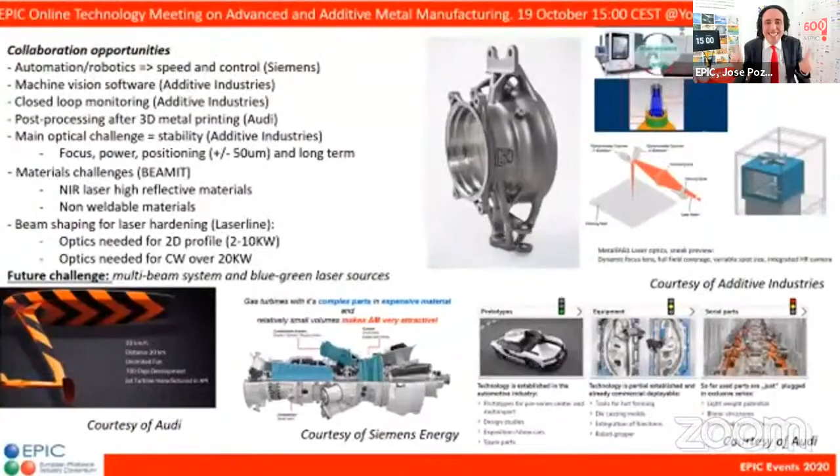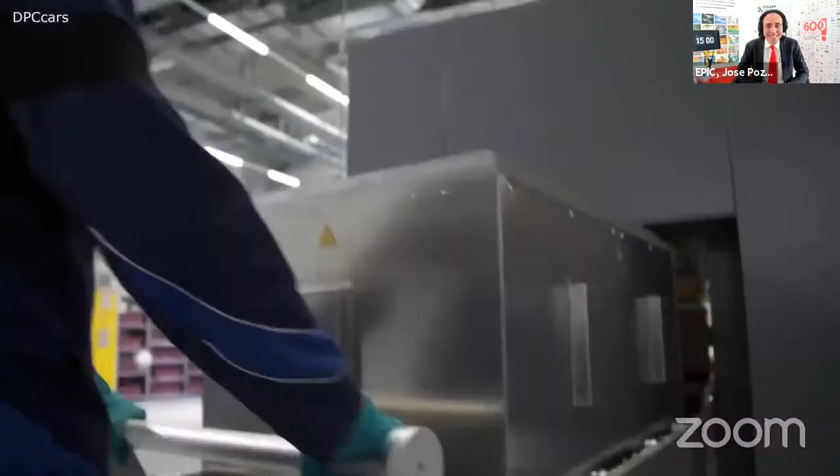Let's get started today on 3D printing of metal. Last October, we had one of the most spectacular online meetings to date. We examined laser metal processing, bringing together the entire supply chain, including large corporate users like Siemens and Audi. We have since then been very busy talking to new users, including Avio Aero, GE Additive, BMW, NASA, as well as Rolls-Royce. But while discussing this expanding field of metal additive manufacturing, we uncovered several important unmet needs, which means there's plenty that needs to follow up. So on Wednesday, February 10th, we'll organize a reunion to bring back those leaders in their field. We'll also introduce emerging players who are exploring new paths with new challenges for the supply chain.

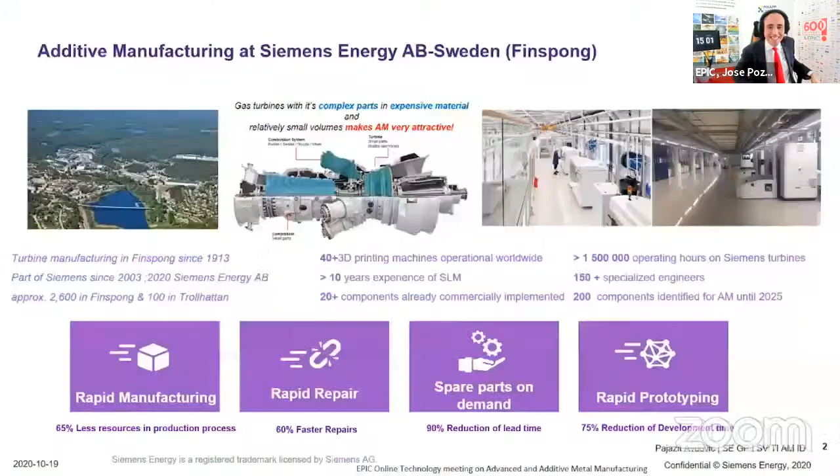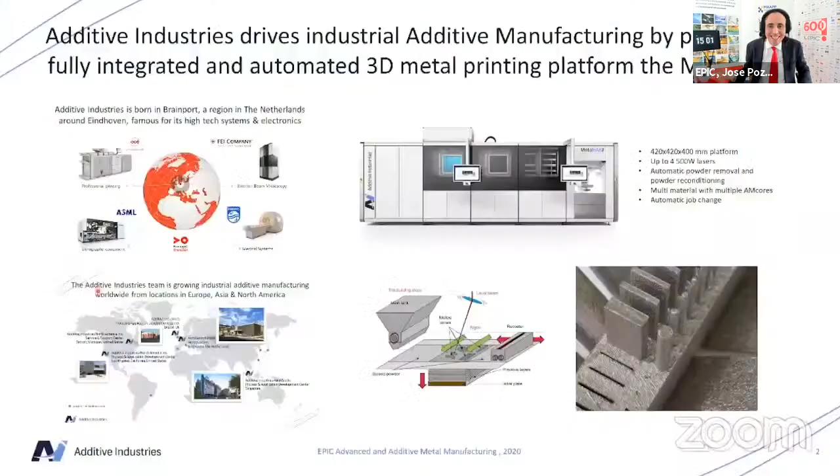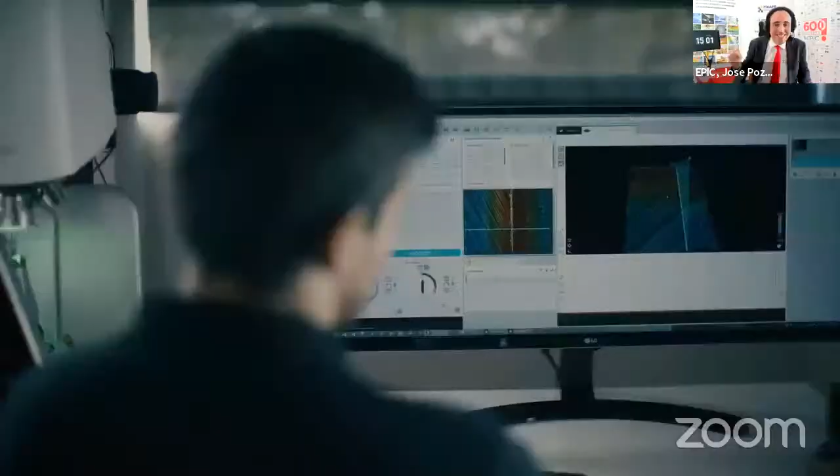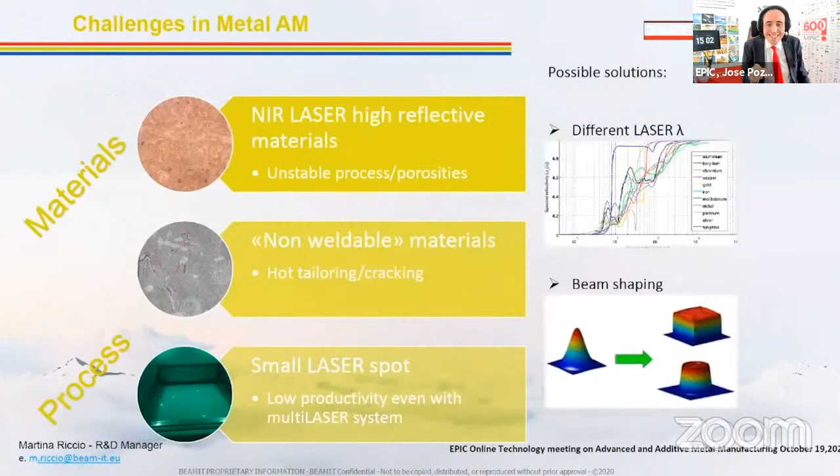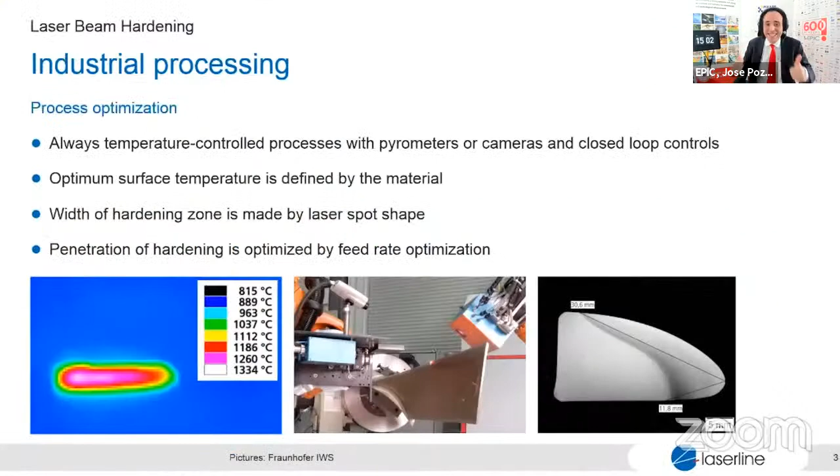The 3D printed metal service provider BEAMIT wants to co-develop near-infrared laser processes for materials with high reflectivity. So let's see what system integrators like Lasea or Prima Additive have to say. And I can't forget the amazing presentation from Laserline and their challenges with laser optics for 20 kilowatt CW operation. Laser optics? They could not have knocked on a better door. Aspericon, Optoman, WCW, Altecna, everyone's here and ready to do business.

As you can see, I'm having so much fun preparing these videos, and then I also love the energy that they try to bring to this community. We are doing so much work on trying to bring the integrated photonic community together, the laser community together, the medical industry together, and Francesca Moglia from EPIC has done so much work in the last weeks, connecting all the different companies that we have in the 3D printing of metal sector.

Today we have an amazing agenda thanks to Francesca. Francesca, you are the only person worthy of explaining what's going to happen today. Thank you very much, Jose.

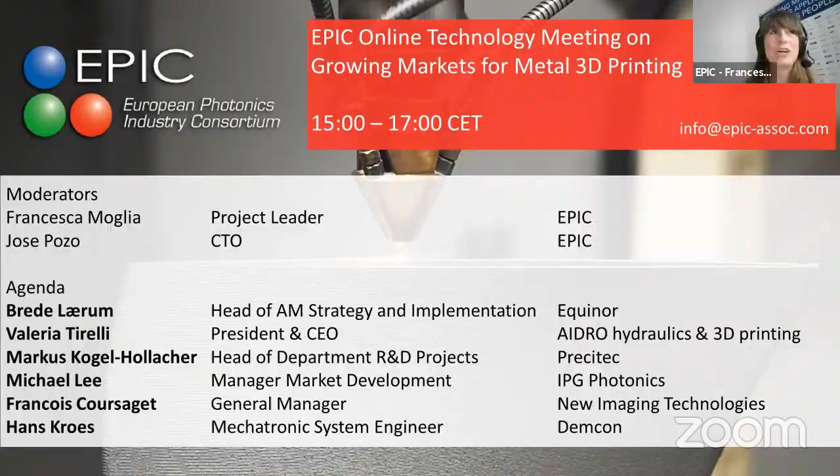Thanks a lot, everybody, for being here today, also on YouTube. As we usually say, here is the list, a bit a boring one, of 6 speakers, but that is not what this meeting is about. The meeting is about this much better slide, representing all the people who signed up for today, filling up our value chain for metal 3D printing.

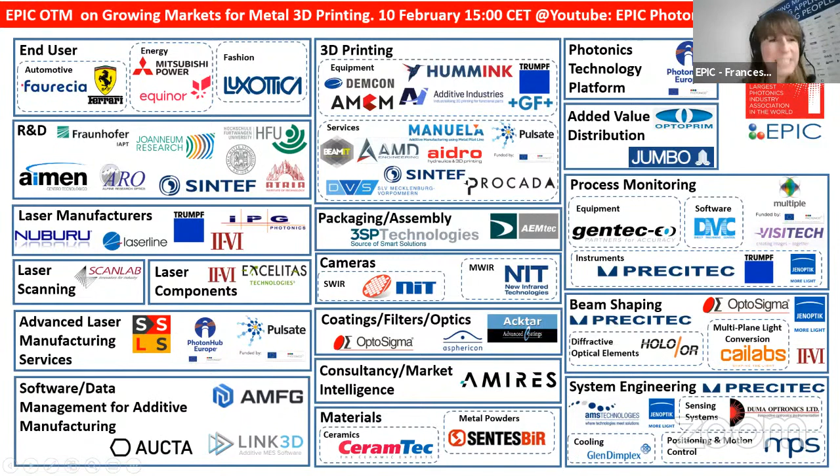As you see, we have end users from 3 sectors happily interacting with us to explain their challenges. We have 3D printing equipment and services - some of you sell the machines, some only the services, some both, so it's interesting to have this middle step of services and job shops. Then we have the rest of the supply chain: laser manufacturing, packaging, cameras for monitoring processes, processing systems, beam shaping - all possible is here.

I guess the best way is to accelerate this introduction and go back to Jose and to you. Francesca, you've done such an amazing job over the last months, connecting the entire supply chain of all the different advanced manufacturing technologies. Hats off to you.

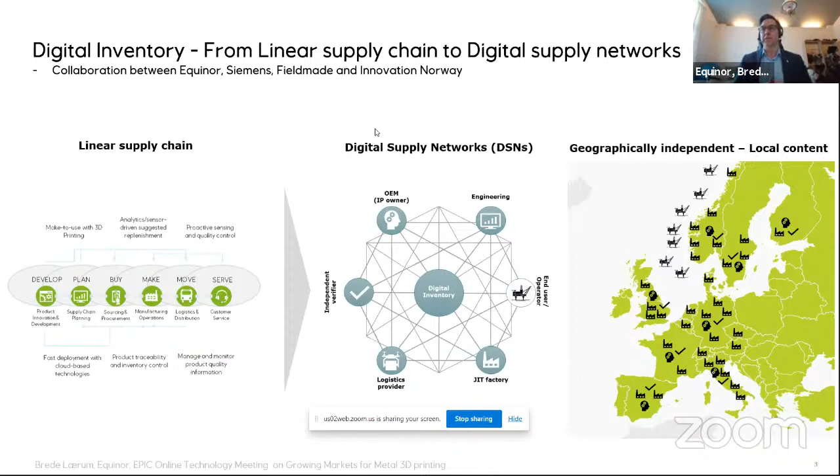But especially when it comes to reducing maintenance and modification, that means for me, instead of replacing a whole compressor, a whole pump, because we have one component inside that is faulty, we can now 3D print the one part that is the problem, and replace the single component instead of the whole system. So we are in this also changing our maintenance philosophy.

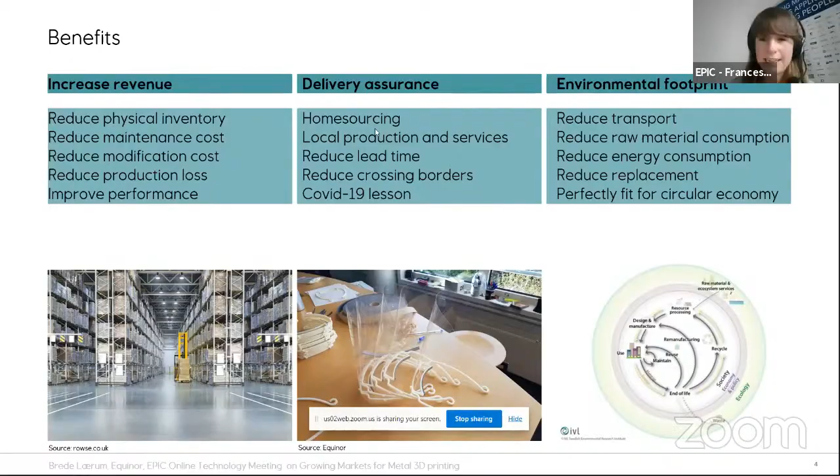Thanks a lot, Brede. Wow, that's something that we really support, because if you present such a nice way already of supporting you and how you're already interacting with your full supply chain, it's basically what we always support also and do with Photonics. So my question would be now, where do you see the connection and participation from the supply chain from Photonics, like more starting from the machine builder also, but the Photonics yourself, and where do you see the challenges that the supply chain could help you with in, of course, implementing this system?

Okay, of course, there are many answers here, but one important issue is that it's not efficient if every supplier and every end user should start building competence and capacity in additive manufacturing and start purchasing lots of machines and having their own production capacity. That's not efficient. So if we go back to my previous slide, having factories distributed geographically around Europe, we need maybe joint ventures between suppliers to go together and build these factories.

You need, of course, to build competence. You need different kinds of production methods like additive manufacturing. You need CNC machining, you need heat treatment, and you need, of course, maybe both X-ray and CT scanning to ensure quality. So building these centers so that we can get the production capacity we need for the future. I call them just-in-time factories, or you can call it on-demand production, call it what you want. But to start working together and build this as an industry rather than working independently, everyone doing things on their own, I think that can really help us going forward.

Can I also ask you if you see that it could be a challenge if we don't do like this, that subtractive manufacturing will always be winning against additive manufacturing? Is it something that maybe can be an obstacle for additive manufacturing? Definitely. I meet a lot of resistance within my own company. I see also a lot of suppliers who are resisting this change. And of course, change is difficult. You have to move into the unknown.

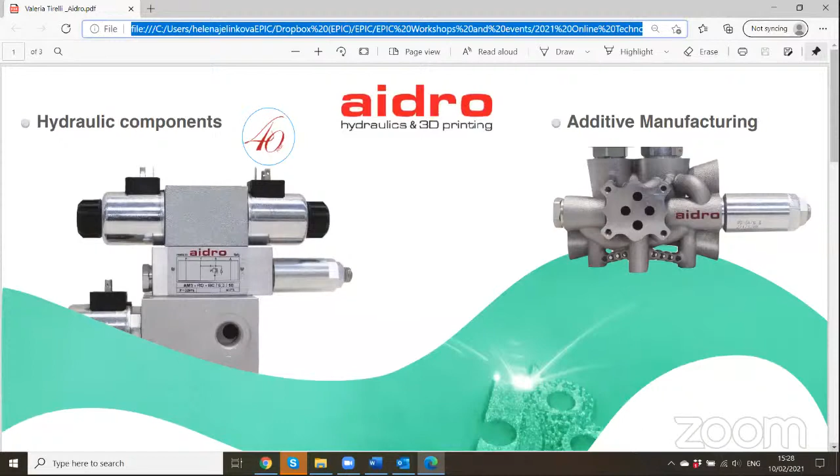At the beginning, it was only for making prototypes or tooling for our conventional production, but we understood that there are a lot of benefits that we can have with this technology. So we started to make new prototypes. At the beginning, it was only polymers, but then we discovered also metal parts, a new generation of metal parts. We started designing and engineering parts with a new approach. We changed our mentality. We also had to train our engineers and technical people to understand the benefit of these technologies. And we started to look at the problems in a different way.

We were able also to develop new products thanks to additive manufacturing, thanks to the fact that we have fast prototyping. We tested different shapes, different functions, and we are able to create a new serial production in a very short time. But we discovered also that with additive manufacturing, we can integrate more functions into one part, or we can combine multiple components into one, saving assembly time, for example.

And also we understood that there are a lot of benefits in the digital transformation. So to start this new journey, together with other companies, not all alone, and to start to think that in the future we will change, for example, our spare parts from physical spare parts into digital spare parts. This is an amazing plan. But we have to start today to understand what additive manufacturing is.

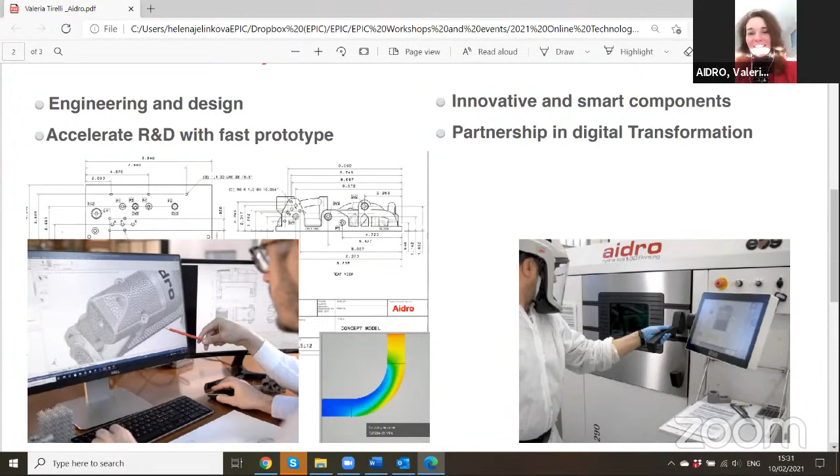And we decided to invest in this technology and make our internal department with a laser powder bed fusion machine. So we have some printers in-house with different materials, and we learn day by day. So making parts, designing parts, and then printing parts, we learned a lot. And now I think we are ready to do something for other companies, but also to learn and collaborate with other companies. And in the next slide, you can see that we can do different products, but the idea is to share the challenges, to understand which are the actual problems, the problems that seem impossible to solve.

But to do this, we also need a better and faster printer. This means more lasers. We have, for example, one laser, two laser machines. Now we have 12 laser machines developed by some manufacturers. But I'd also like to ask the photonics industry, maybe you can think about having a 1 million laser machine, to have faster production and to help additive manufacturing become real mass production for the future.

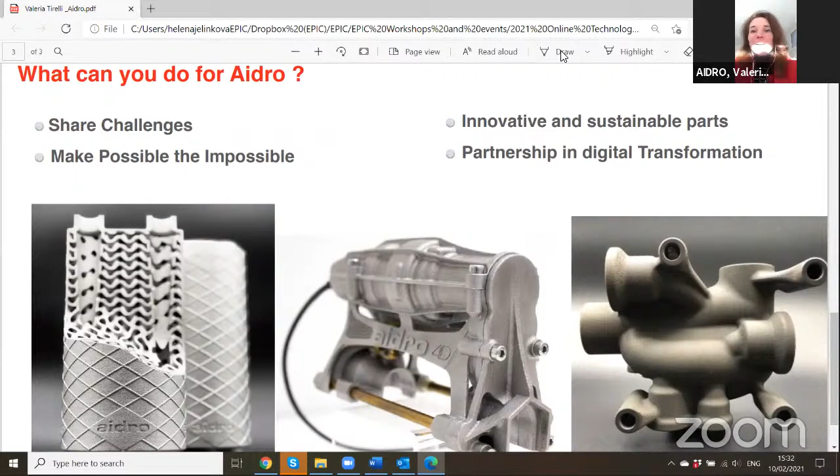So I'm really happy to be here, and thank you so much, Valeria.

No, don't worry, that's going to happen. We're going to find collaborations. There are many questions, this is an EPIC meeting, and you knew your lesson. You came here with challenges. The first question comes from Michael Lee from IPG.

Michael, what's on your mind? As we have end users in the room, and we've seen it from the well-developed semiconductor industry, they lay out a roadmap for us, for this photonic supply chain, in terms of future tasks in 1, 2, 3 years on build rate, costs, and so on. As you mentioned, you're increasing the number of lasers. Is that all that would solve the challenges? What challenges do you have today?

Today, challenges with the machine are multiple. Productivity is one, and maybe that could be solved with lasers. But also, the cost of the machine, because today there are different manufacturers of the machine, but the average price is quite the same, and it's still a quite expensive technology. So to implement this technology at the moment, we have to find a good balance between the added value of the product and the cost on the market. So another good point could be to reduce the cost of the machine and the cost of the products.

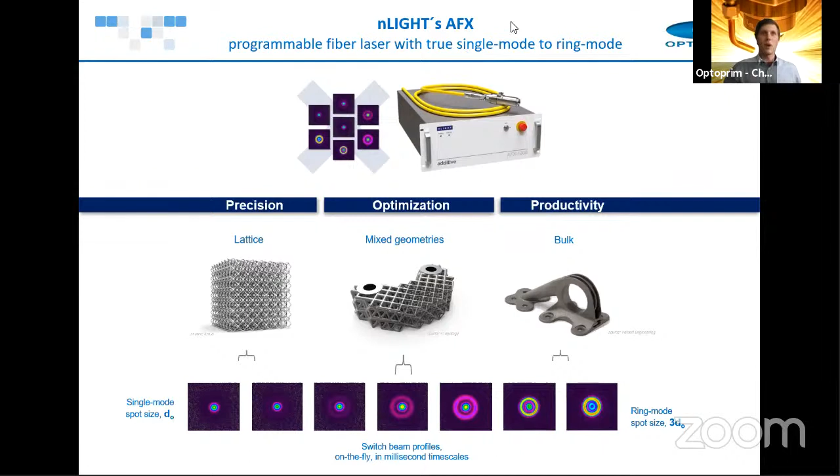And maybe that's the next step or level for the AM market and production using parts in the industry. What's really amazing here is you can go from one shape to another while keeping the average power, and we're talking high range power, around 500 watts. Keeping the average power in milliseconds while going from one shape to another is truly amazing. We have 550 watts in the core, but the total laser power is 1.2 kilowatts, and we can distribute the power from the inner side to the outer side on the fly during scan speeds, within the different geometries of the part - inner, outer, fine features, mixed features. That makes it really strong, flexible, and very productive at the end.

Christian, good luck with the Prism Awards. I'm betting on this one.

Yes, thank you for the kind introduction, and hello everybody for this interesting afternoon. Again, an interesting topic EPIC put together. I think I can answer some questions which have been asked in the last hour. I want to point out that 3D printing is not only what's now named the PBF-LB process - it's not only photonics, photons, and powder bed. 3D printing is more. For information about Precitec, you should visit our website, so I won't waste time on that. If we talk about printing, we also talk about DED with powder. These are the typical nozzles you find in DED processes: off-axis, ring nozzles, multi-beam nozzles.

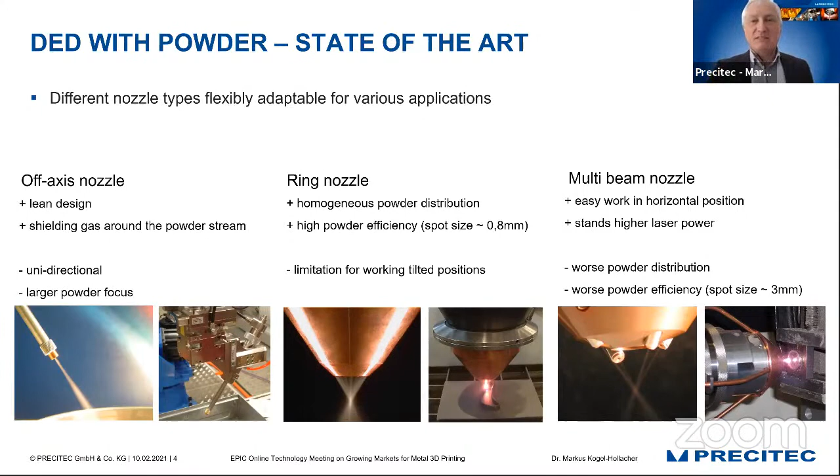So this is not new, and there's no innovation behind it. But if we talk about innovative machines, we need to talk about BeAM, for example. BeAM is using our devices, our modules. Precitec is famous for generating modules. It's like Lego for laser technology—you just put together the beam guiding modules you need for your machine, and BeAM is using our modules for their machines.

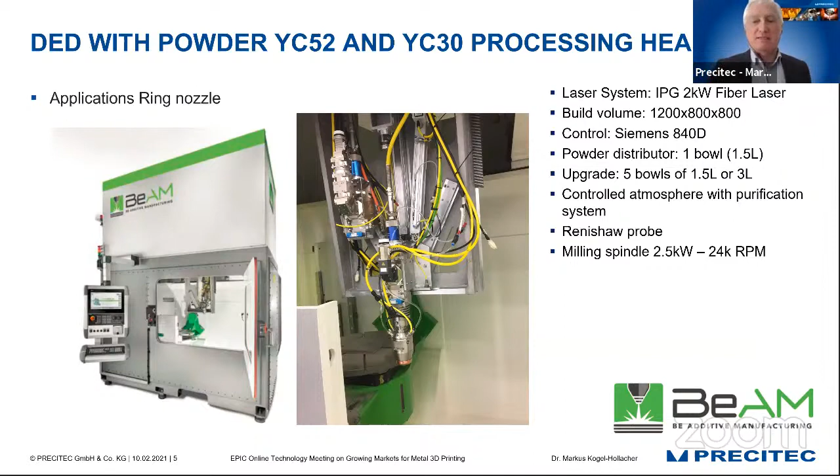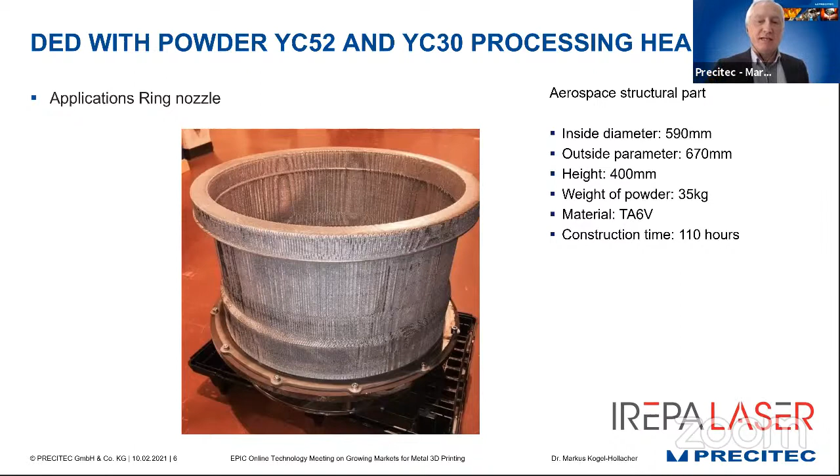But one of the topics Jose was addressing in the invitation is sensor technology—sensors, machine control, machine vision. And as you may know, I've been talking about one sensor for the last decade, which is the OCT sensor. From my perspective, and from the perspective of many users nowadays, it's the only sensor in photonics which can really measure the needed information during processing. And the needed information in 3D printing, in additive manufacturing, is surface height, surface structure, surface topography.

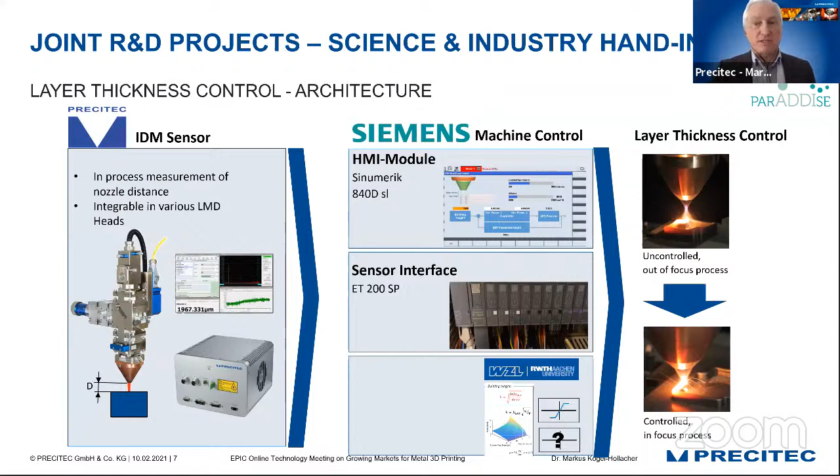This is what we did together with Siemens in one of the European funded projects we have been involved in. This project is now finished, and we were able to build a closed loop control for DED powder processes based on OCT. So we do not control laser power—we control the speed. That's why we went together with Siemens into that project, because if you take a deeper look into the control variables, you will see that speed is much more effective on process regulation than laser power.

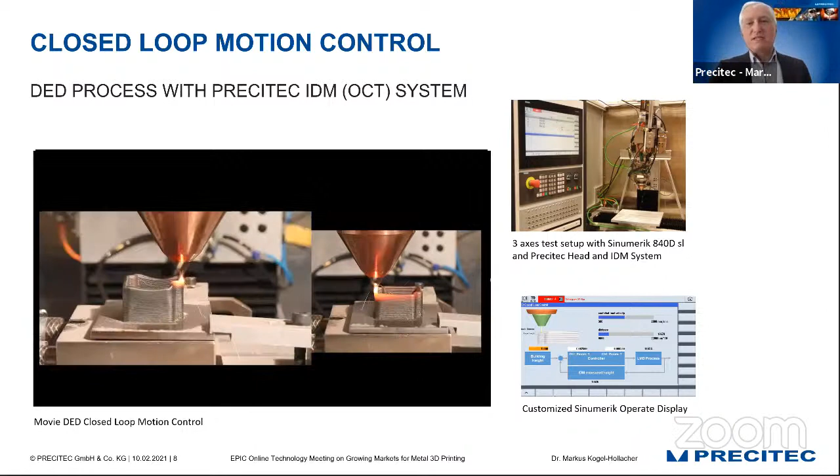I don't want to go into deep detail, but you see this is the uncontrolled process. We have a controlled process later on. So this is the closed loop control we use OCT with.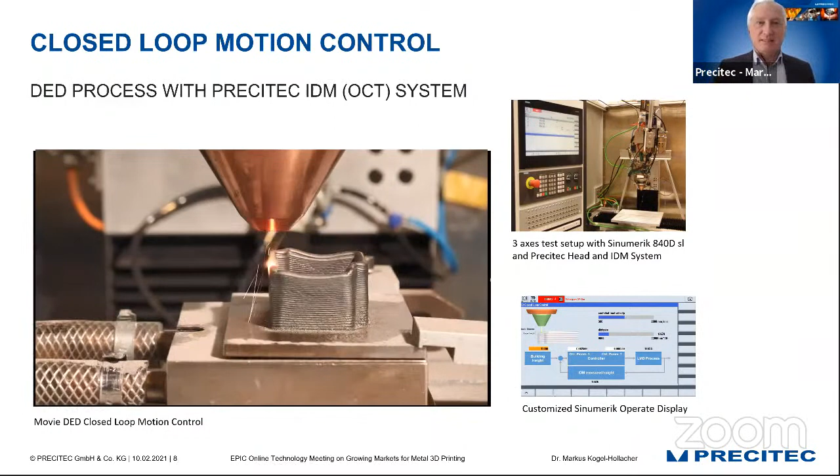But let's go to my other favorite topic, which I've been talking about for some years as well. It's the GPS system for photons, which I call the future of laser materials processing. We talked about that in the Q&A of the last presentation. So it's important to know where photons should do their work, and it's important to guide the photons to the right position.

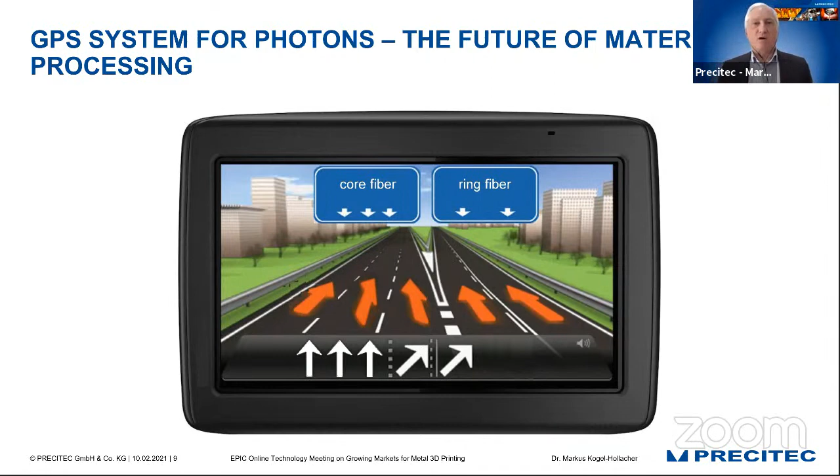Fiber, powder bed or not powder bed, and in subtractive photonic applications with ultra-short pulse lasers, whatever—we are talking nowadays about GPS systems for photons. One of the devices we have generated in the past is our printer head, which we call the coax printer.

So if you do 3D printing, and if you use wire as the additive material, the easiest way to be direction independent is to support the wire from the center and bring the laser from the side. This is what we have realized with that optics, with that processing head.

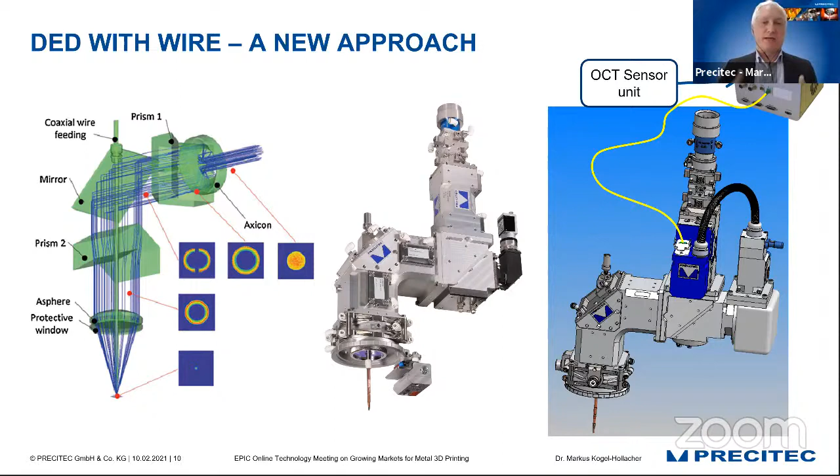You see that we come from a standard laser—it can be any kind of laser, any beam quality we can use. So we generate a ring, we open the ring, introduce the wire, close the ring, and then we do the printing. You see one of the devices we have recently installed on a machine.

You see also all the interfaces for state-of-the-art sensor technology—camera, OCT, pyrometer—everything can be adapted. It's again the modular principle.

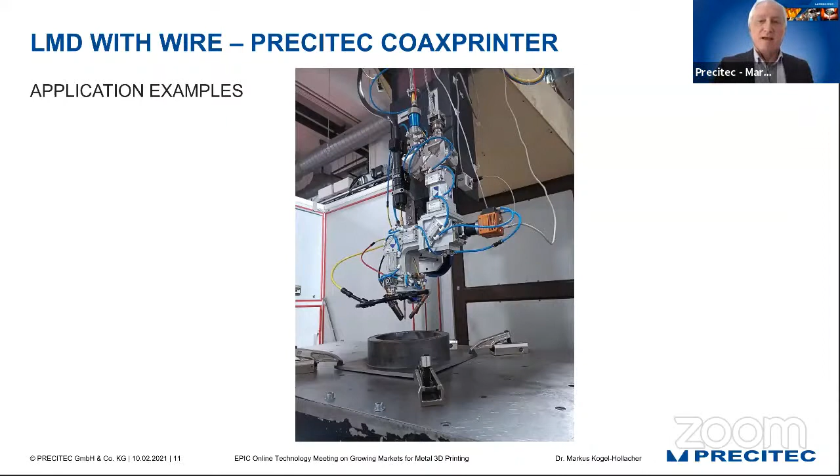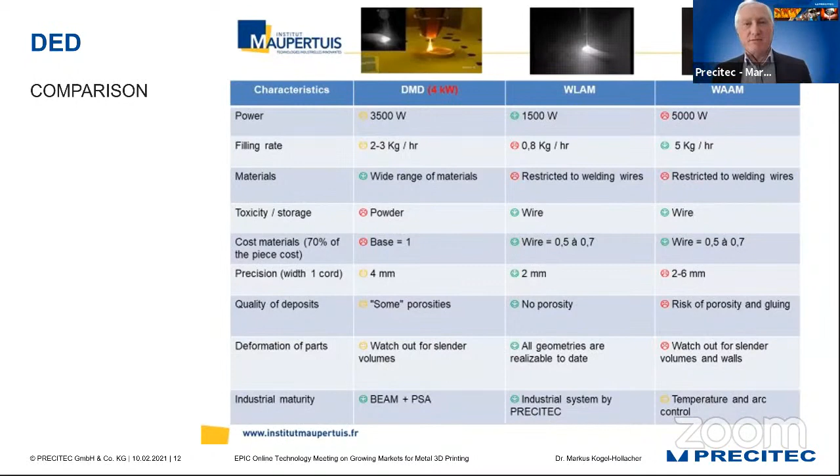And if you compare that process, which is here in the middle of the table, with the competing processes—on the left you see the powder process, on the right you see the wire process without photons, what we call the wire arc possibilities—you see that we are very good in accuracy, we are not so good in filling rate. Filling rate here is getting even better; I'll talk about that later on. So this is a very, very interesting alternative to 3D printing from the powder bed.

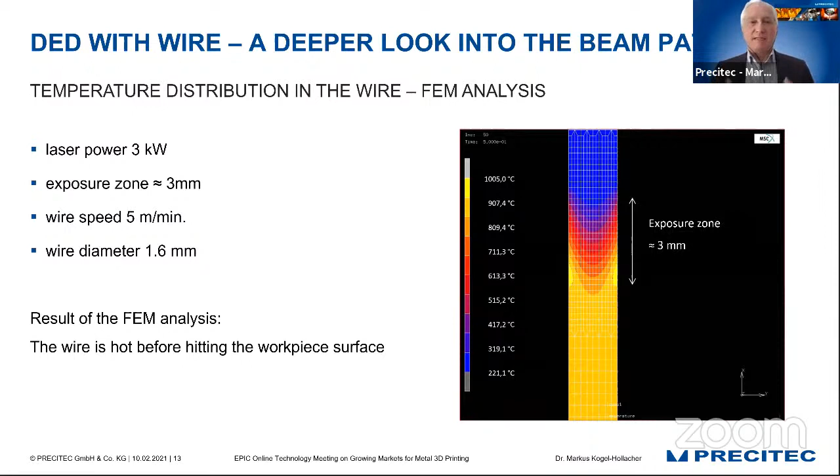What makes that optical principle so unique is that with the special beam, we heat up the wire before it goes into the material or onto the surface, so the process is very smooth—it's even the smoothest process you've ever seen in laser materials processing. But this is the key topic: we can use any kind of material. You see we did processing with stainless steel, aluminum, titanium, Inconel, flux core wire, bronze. This is easy.

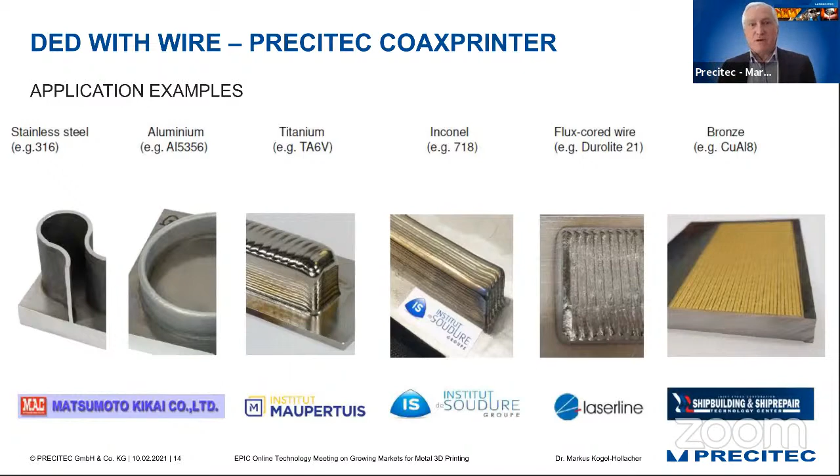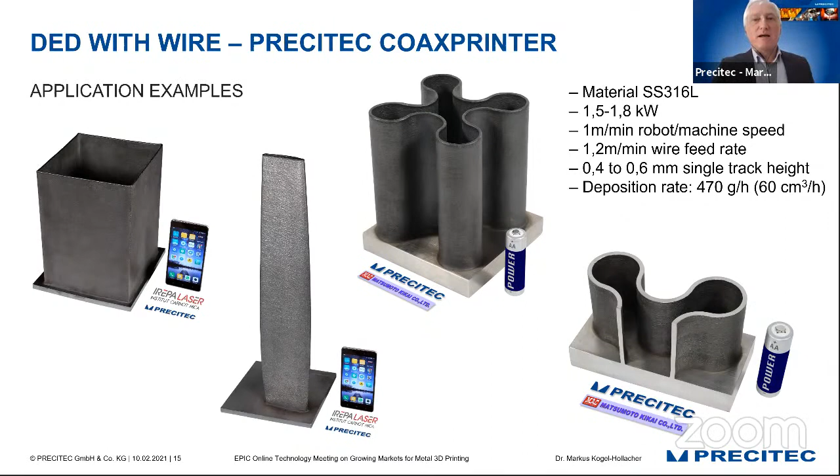You change the wire in less than 2 minutes and you're ready to build another part with another material. Here you see some application examples, always with a battery or a mobile phone as reference, to show how big we are. Here you see the other applications.

And what is very important, as I said, the process is the smoothest photonic process you have ever seen. And we don't waste any material. 100% material use. You do not need to clean anything, you do not need to recycle anything. This is the future of 3D printing.

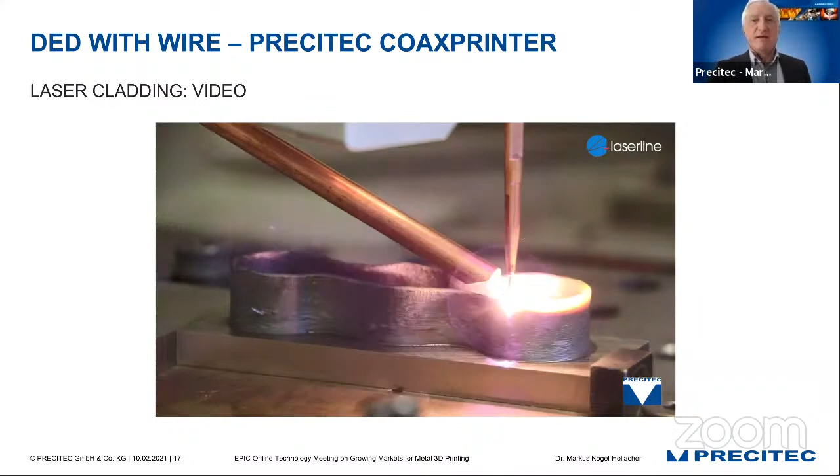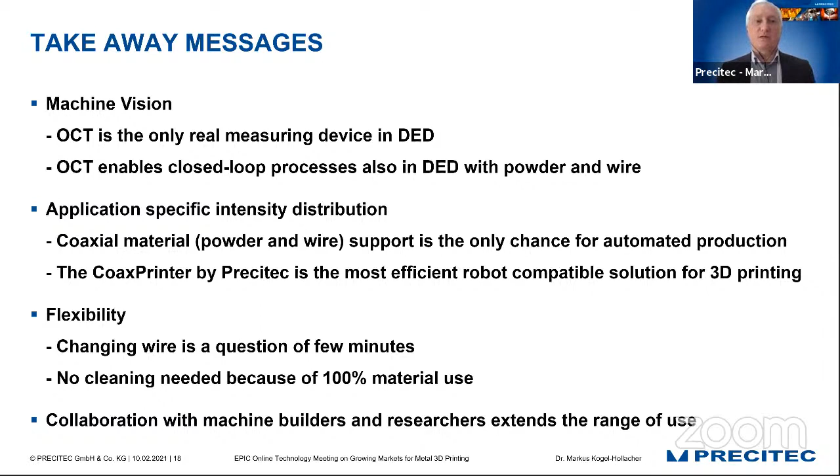So let's take away messages to take home. If we talk about machine vision, the OCT sensor is the only measuring device in DED. It's also a measuring device in the powder bed, the PBF-LB process. I haven't had the time to go into that topic. We show application-specific intensity distribution with the coax printer, and we show that this is a highly flexible process.

So what can we do for you, and what do we need from you? We offer the easiest to handle 3D printer device for build-up of near net-shape geometries and functional assemblies, no question. What we need is to raise the confidence that the DED wire process is a real alternative for 3D printing, and we showed there is more potential applications, for example hybrid applications.

So with already existing products, you can print on your functional device, and then you can generate standard parts by subtractive processes, and take the hybrid, the 3D printer, and print on this part where you need it. Okay, so thank you very much for your kind attention.

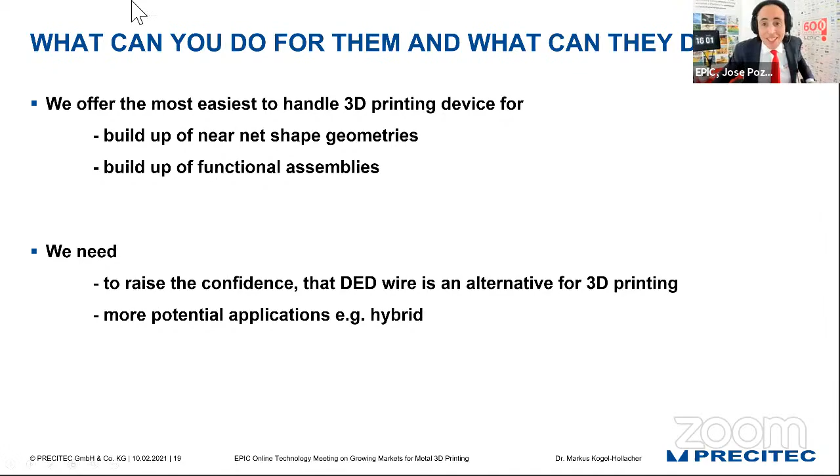Thank you very much, Markus. Thank you so much for this, and thank you for all the different opportunities that we have here. Francesca is smiling — when Francesca smiles, I keep quiet. Francesca. You are muted, we can't hear your beautiful voice. I don't know what's going on, but let me take this. Markus, this is an epic meeting, you know, epic, and thank you so much for joining. You made me so happy.

But in the epic meetings, we ask the epic question: a few specific challenges, room for cooperation — what can you do for them, and what can they do for you?

Yes, so as I said, if you think about 3D printing, you should not always think about powder bed machines. We've heard powder bed machines are maybe too expensive, maybe too slow. There is a difference between powder bed processes and what I have shown — it's the accuracy of the structures you can generate. But if you do not have high demands on very fine structures, you can easily take a processing head like I've shown, put it on a robot, and print your part. You just take the CAD data file, put it into the path planning, and at the end you're ready. It's near net shape, the surface quality is excellent, comparable to the PBF-LB process. And as I said, we can use any kind of material — every wire you can find on the market can be processed with photonics.

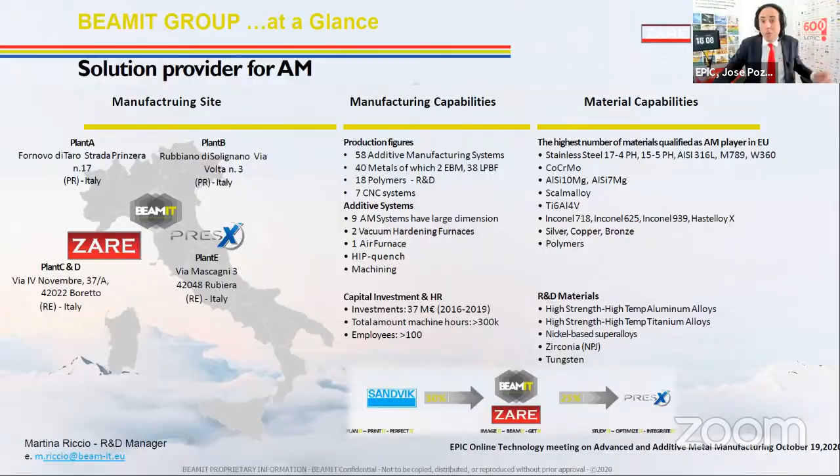And yes, of course. Martina, I want to highlight that in the previous meeting, it was clear that there was huge room for cooperation because BEAMIT is one of the largest solution providers for 3D printing that we have in Europe, and you were looking for many R&D cooperations. Actually, that was your call, starting R&D cooperation. So I want to refresh this. We already introduced many companies to BEAMIT, but anybody who wants to start any R&D cooperation in 3D printing, from beam shaping, from real-time monitoring to detecting of small defects, Martina and many others are the entry point for BEAMIT.

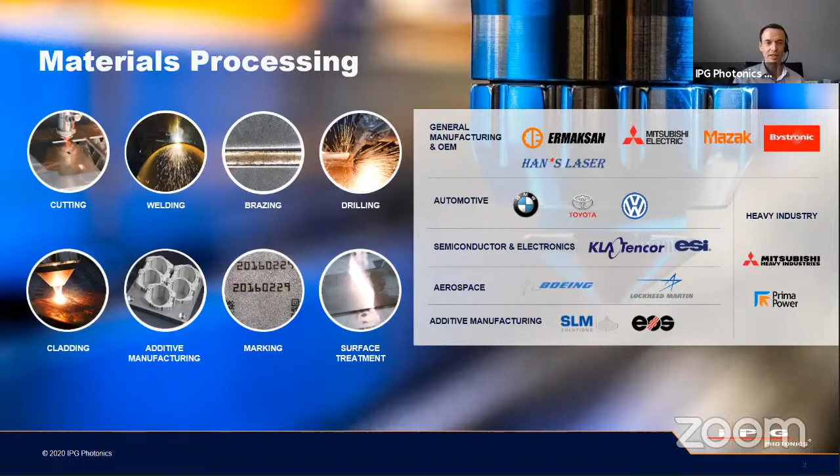As a technology leader and pioneer of fiber laser technology, we have been linked with the 3D printing industry for almost 2 decades. So we were there at the early stage when this metal printing industry switched from inefficient CO2 lasers to the first fiber lasers. And it is an amazing story on the continent, how this was taken from the institutes, from a few R&D systems, to being really widespread in the industry. And we all want to continue on that, I guess. So you see here some of our reference customers on the list down there, EOS and SLM, for example, which have a long way with us already.

To continue with that, let me share some of the insights on what we are working on and what we want to continue discussing with you. Recently, we introduced the world's most compact fiber laser sources, which are used in the 3D printing industry right now. They are not limited only to 1 kilowatt, it's going higher. These are the most compact systems on the market, which save some costs in the machine, of course, and some space.

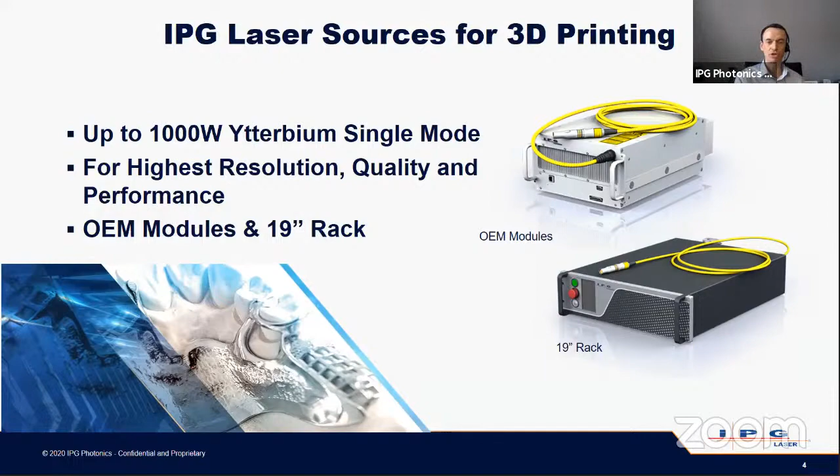More widespreading ideas: we have seen the race between the integrators for putting more and more laser power on the machines. And I guess this race is headed up by SLM currently. You see an example on the right side. And as I understood, Valeria, you're one of the earliest users of such a nice tool with so much laser power on the machine. So good luck getting processes and many parts done with that amazing tool.

Of course, this is only one part of the race, let's say putting more lasers on one tool and stitching the scan fields. On the other side, we have heard already about the mode beam propagation switchability. We call it adjustable mode beam laser, AMB laser, which we can produce up to 25 kilowatt. This combination of single mode and multi-mode beam propagation can be switched, as we already heard, in milliseconds on the fly. So we are able to support you, not always up to 25 kilowatt in the beginning, but let's start seeing how this enrolls into your processes with as many kilowatts as possible, so that you can get the cost down.

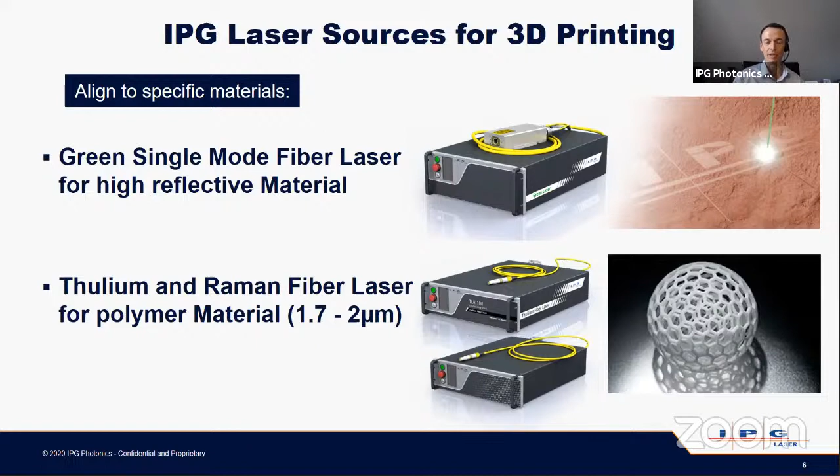We have seen also for other materials that we need to adapt the wavelengths too. In our really broad portfolio of fiber laser sources, we also find suitable sources for high reflective materials. For example, in the past years, a huge topic for all of us has been finding suitable single mode green lasers for that. We're also having them in the portfolio, but also, looking over to the polymer 3D printing machines, different kinds of materials can be directly addressed with different laser sources, different wavelengths, where they have different absorption behavior. And this is all within our portfolio. We would be happy to discuss that further.

That already sums up my presentation. I go to the classical EPIC question, but before that, let me sum up what I wanted to present. We are in many of the integrators. We're helping them decrease costs and increase the throughput, and we would be happy to continue with a huge portfolio of different solutions from one supplier. What can we do for the EPIC network? With all the experience we have in the field, our lasers have made progress for two decades, we are a reliable source provider, plus have a proven world record on operating hours, which is beneficial for the end users. And so what can you do for us?

We would like to take your business cases and discuss your ideas to get rate, reliability, and repeatability to the next level, so that we can succeed with the 3D printing story on the European continent. That's why we're looking for partners which can take more designs or new designs which absorb more power and even reduce the footprint per watt and the cost per watt further. Thanks for listening.

Thanks a lot. I hope you hear me now. Yes, Jose is happy. So sorry, before I was dropping out.

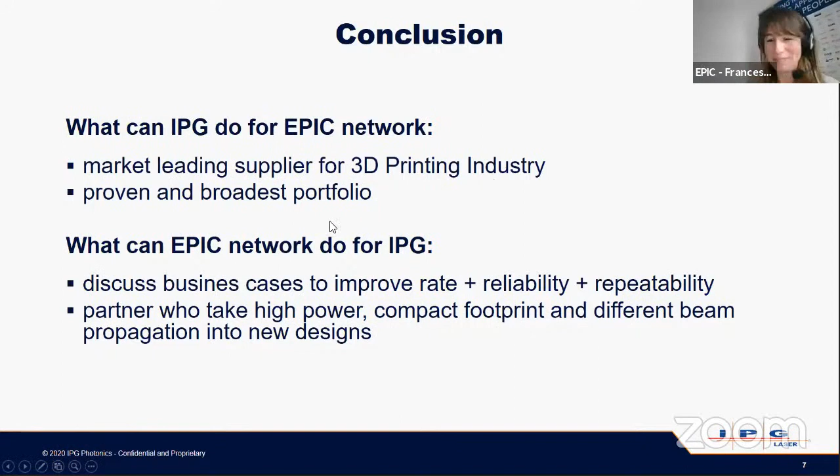So thanks a lot for your contribution, Michael, it's great to discuss always with you also on a general level. I have first a question that is a bit more general. You are dealing with different materials, and we saw the different wavelengths you are trying to approach. And I guess that for AMCM there is also a question, so maybe he can ask this in this topic, right? Yeah. Bernard, thank you.

First, I have the impression that if you have faster scanners and more laser power and more lasers, the whole process runs faster. That's just part of the story. If you add more horsepower to a car, it doesn't mean that you can drive faster on the road. You have to consider heat impact into the powder and all those things. So we're working on that. Beam shaping is an issue, but there's much more, gas flow, than just laser power. Just to correct that a little bit from the previous discussion.

My question to IPG is the following. Your current green lasers are pulsed, and what we need is CW, especially for copper materials. Is there any progress with the current model? Thanks for raising this question. Actually the lasers are QCW, having repetition rates of 180 megahertz, and to my understanding, the material integrates over that already. We have integrated one of your QCW green lasers, and the results were not as good as CW. That was the first part of my question. So it's still a QCW green laser, right? Yes.

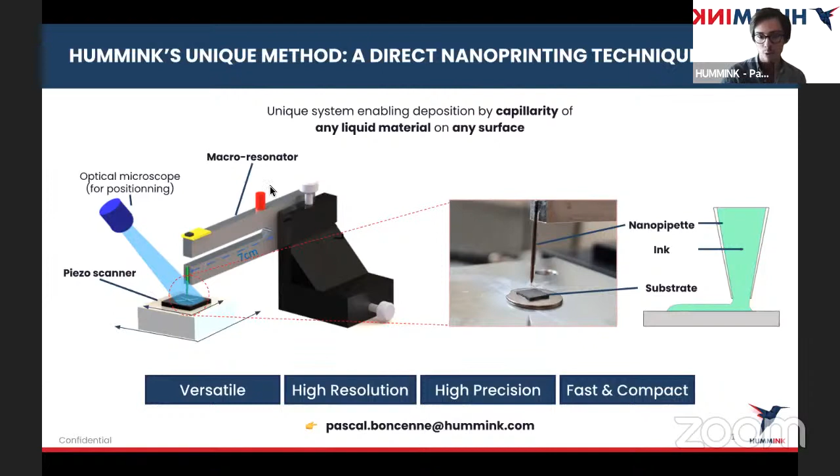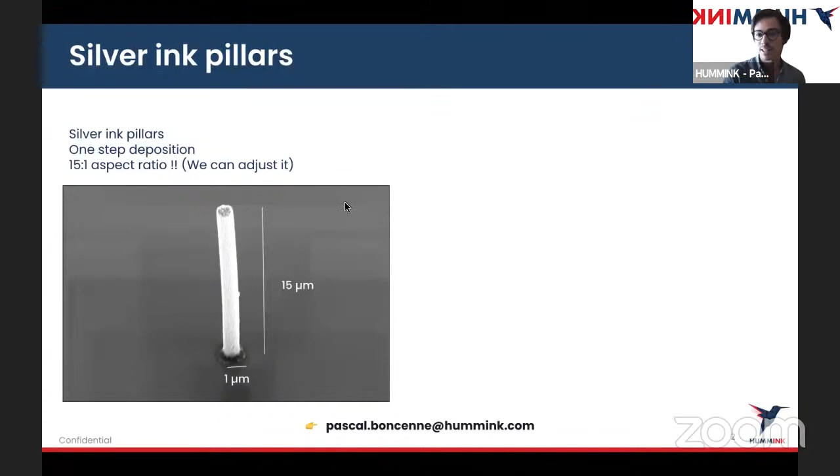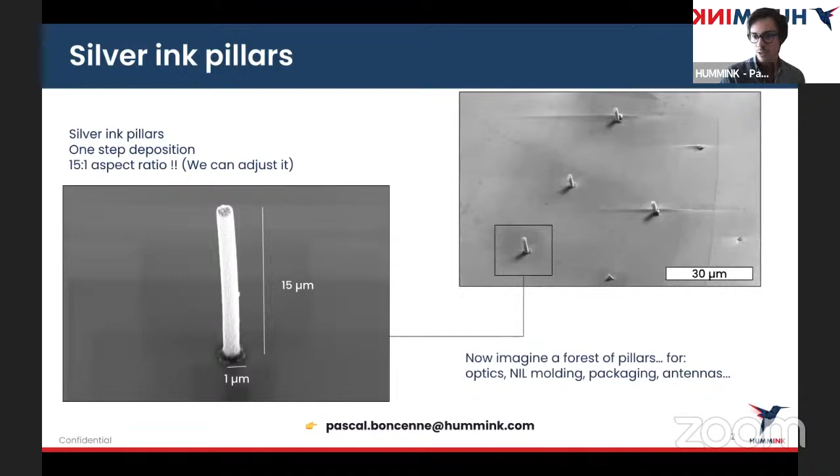So I wanted to join this 3D printing meeting since we're able to, as I said, print different types of liquid, and we can deposit colloidal suspensions of metal, and we've been able to deposit silver ink pillars like this. Here we have a 15:1 aspect ratio, and you can see that we can design objects at a very microscopic scale, and we're able to design a forest of silver ink pillars like this. Any liquid into any structure.

This is not metal printing. It is not, I agree on that, but this is one of the most innovative things I have seen in the 3D printing ecosystem. Any liquid can be 3D printed onto any substrate, and they have the whole process and they want to make their own machines.

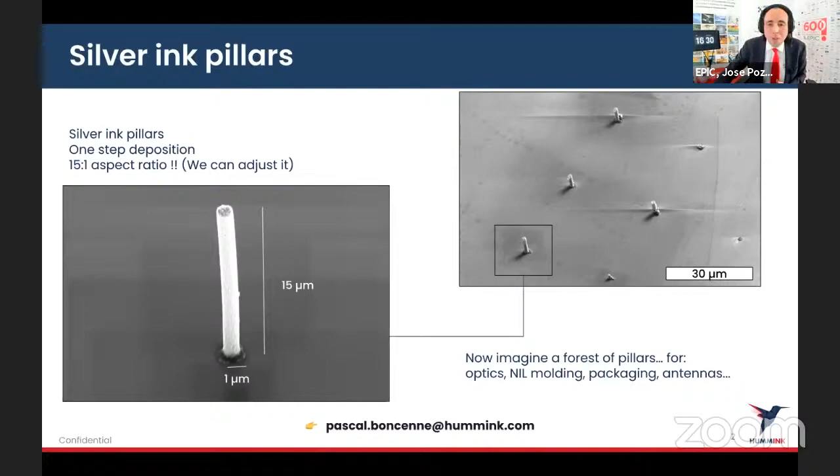Francesca from Ferrari, let's discuss this offline, but this is one of the most innovative companies that we have in EPIC. Pascal, don't answer the question about the investment. I know the answer and I want to put some money on this. This is really, truly great.

Thank you so much. And I want to go now to the next presentation, to a company that has made a big difference in the field of shortwave infrared sensors, New Imaging Technologies. I didn't make a mistake this time. New Imaging Technologies. Francois Coursaget, thank you very much for being with us today. NIT, the floor is yours. Yes, hello everybody.

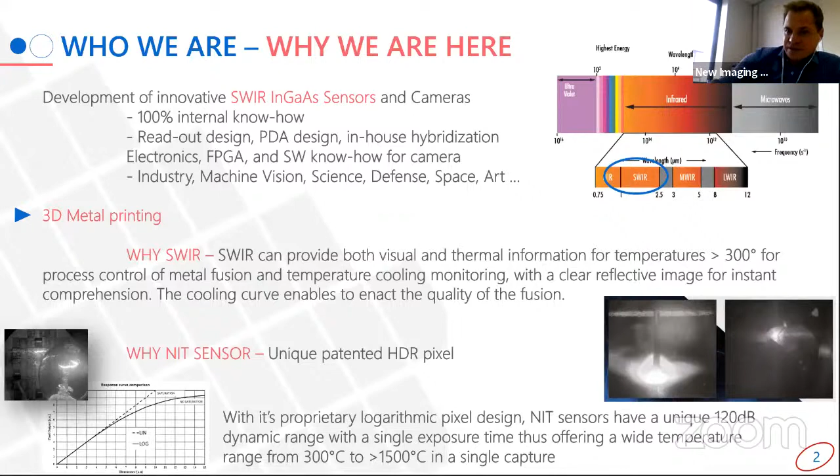Now, why an NIT sensor? Our sensors have a unique and patented pixel design, where we have 120 dB dynamic range within one single frame and within one single exposure time. That means we can actually explore this huge dynamic range from the visible reflections all the way to thermal information up to more than 1,500 degrees with a single capture. So that means you could really control your process and your cooling down process of the 3D printing.

Very quickly, in terms of products: we started in 2016 with the first generation with this HDR logarithmic pixel, second generation in 2018 going down in pixel size and combining high dynamic range and high sensitivity, going down in 2020 to a more industrial 7.5 micron linear array, and third generation megapixel 10 micron going to be released this year. What's interesting is that we participated in a contest organized by the French BPI, the Public Investment Bank, and we won a contest to develop a dedicated sensor and camera which will really be dedicated to this application of 3D metal printing. We're expecting to have our first dedicated cameras available through the summer.

So we are working with two partners today on actually making this link between the thermal cooling process and avoiding those cracks or any defects that you could have during the metal 3D printing process.

I have a video. I'm not sure the video will run, but let's hope so. In any case, you can see the video on our YouTube channel, New Imaging Technology, NIT. You can check that video online. Let me just speed up the video to the interesting part.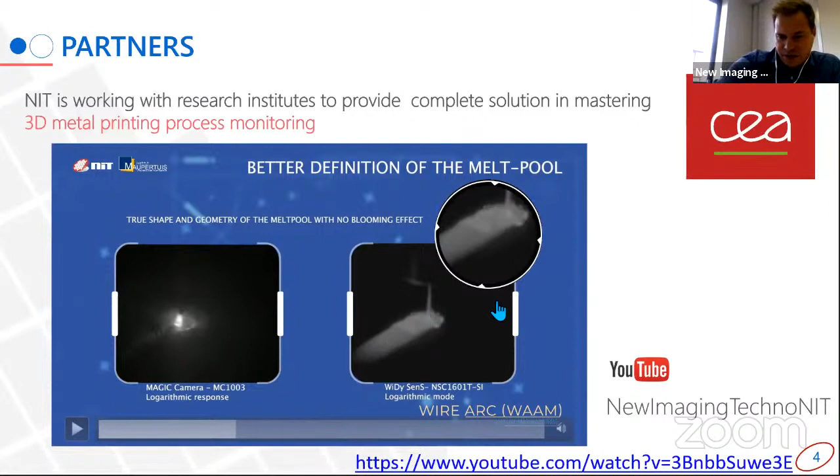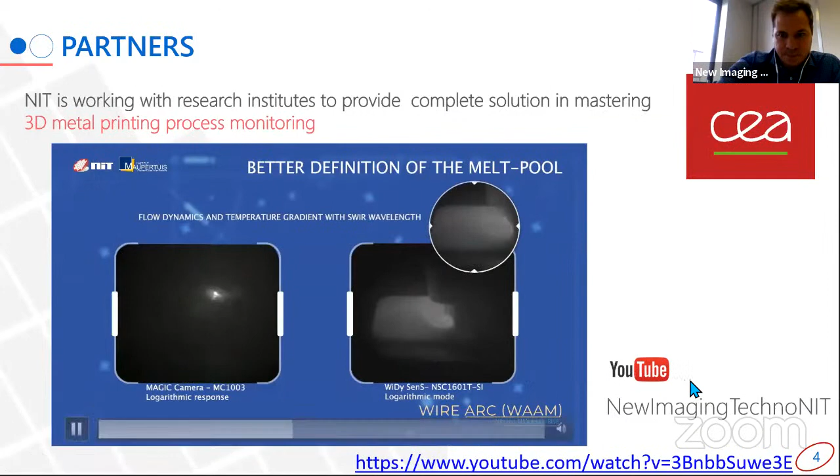I think we are not hearing the sound. So tell us what we are seeing, which is, by the way, beautiful.

So what we're seeing here is, once again, on the left the visible CMOS imaging, and on the right there's shortwave infrared imaging, where you can see this information on the cooled down surface of the material. That's the main difference with the CMOS imaging sensor: with the shortwave infrared you have thermal information.

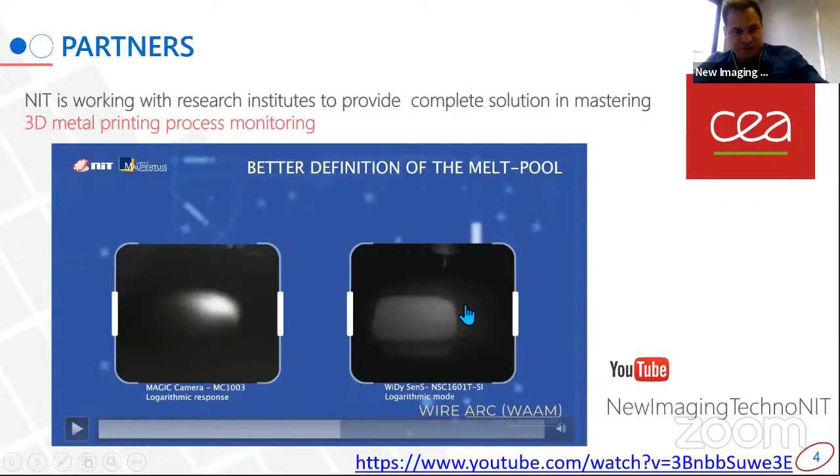Let me just try to turn the sound off on the video. Oh, it's okay, we cannot hear it anyway, so it's fine. I don't know how to take that off. It's okay, it's okay, just tell us what we're supposed to be seeing.

In any case, what I was saying is, oh, here we go. So here you have the video. Yeah, I'm just speeding up. I just can't. Oh, there, got it.

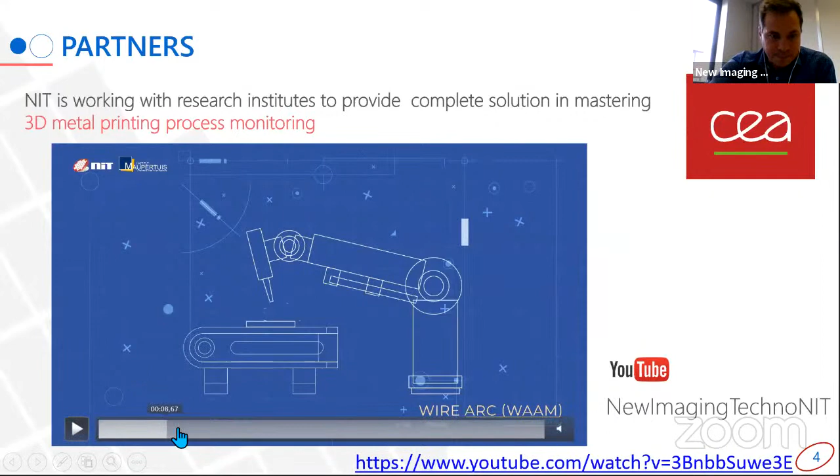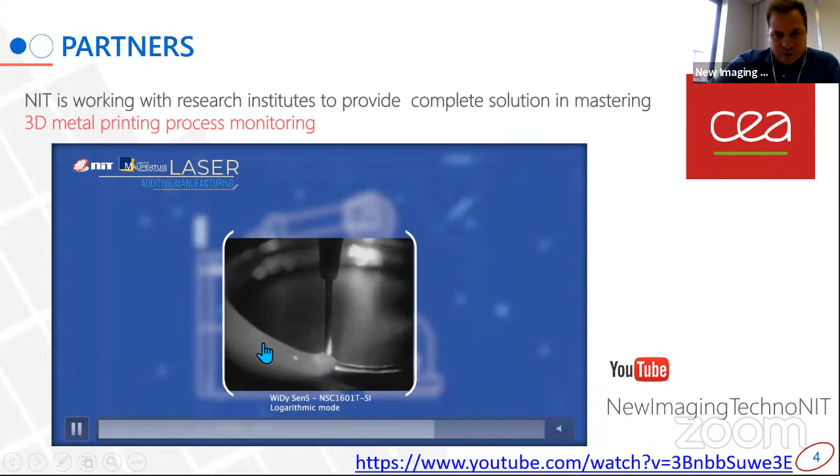Here, this is the welding on titanium, where you can see the interest of having this logarithmic mode, with a very high reflectance and high temperature. You can really control this curve and have this information on the cooling of the material itself.

So we are working with the CEA, the French Nuclear Energy Research Center, to make this link between the thermal cooling and the quality of the print itself. We will be able to present something together within probably the end of this year.

Very good, Francois. So that's the epic questions. Very good, so yes, that's the next question. So what can you do for us?

We are looking for partners. We're a small SME, 20 people developing this technology, and of course we work with partners. Typically we would look for partners working on the packaging side, because that's one of the critical issues when making cost-effective solutions with SWIR sensors. The other issue is the optics itself, because it's nice to have a high dynamic range sensor, but if you don't have the high dynamic range SWIR optics to go along with it, it's tricky to capture the whole useful information.

And then, as we are not software oriented but really developing the camera, it's always interesting to work with partners that have software knowledge in terms of development of thermography type applications. And of course we're looking for trial tests, and we need to accumulate as many sample tests in 3D metal printing as possible to better understand how all this works.

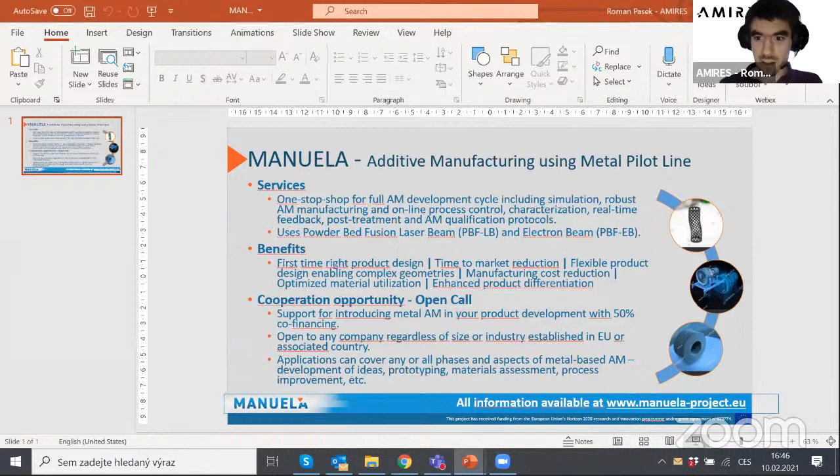So basically what we have here is a project funded by the European Commission in the Horizon 2020 program called Manuela. We also have a cooperation opportunity for you in terms of an open call, which is currently open. I'll try to be brief about what it's all about.

What we can offer is a one-stop shop for the full development cycle of metal AM. We include simulation and modeling activities, the manufacturing itself, online process control during manufacturing, and machine learning algorithms that give real-time feedback for the manufacturing process. We also offer post-processing, post-treatment characterization services, all in line with qualification protocols, so that it's easily adoptable by the market. We use powder bed fusion technology with laser beam and electron beam, so we have different machines for that.

We're also working with a range of materials - titanium alloys, aluminum alloys, stainless steels - quite a big assortment. You can find more information on the website. I don't think I need to go into detail on the benefits, because these are general for additive manufacturing, and you're all very much aware of that.

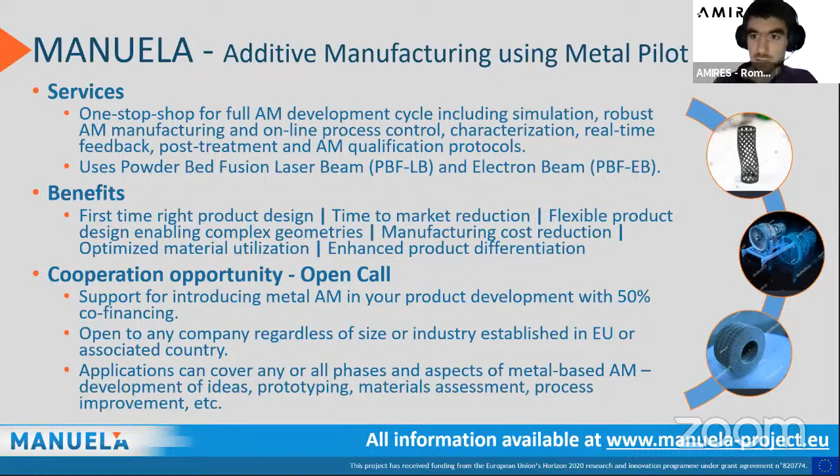So if it's just about some material assessment and characterization, or about the post-processing, whatever your specific need is, you can apply with a very simple application, if that would be of interest to you. That's all I wanted to share. Of course, if there are any questions, I'm happy to answer them.

Thank you. Thanks a lot, Roman. So as we see, the Commission - we heard at the last meeting that everybody, the big companies, from automotive, from the energy sector, are wishing for Europe to really work together. So the Commission knows about it, and it's good that this contribution is given by them to SMEs and companies in Europe. That's really nice to know.

But now let's go back to the hardware. We have a solution finder in the room - of course it's not only him - but Hans today from Demcon would like to give us a couple of examples of what they can do, going back to the hardware, so not only the monitoring, but also the system integration and engineering expertise for 3D printing of metal, right, Hans?

Yes, that's correct. Thank you, Francesca. I will share my screen. Right, is it visible? All good. There you go.

Thank you for the opportunity to present DEMCON in this consortium. For me, it's the first time, so please excuse me if I don't fully understand the format of previous presentations. I tried to write something down, but I'll try to give my best to demonstrate what DEMCON can do in the field of 3D printing.

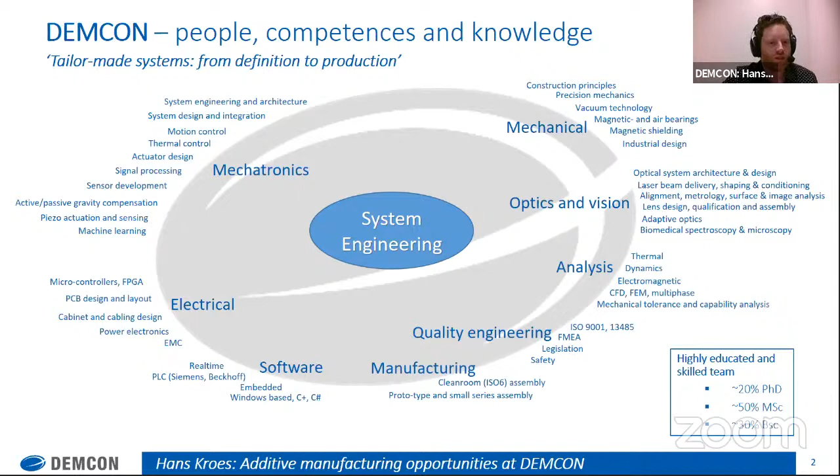We have experience with some 3D printing projects, all for external customers. I found two that we are able to share. It might also be interesting to know that we do a few more projects, so it could be possible to discuss that after this presentation, more like a private discussion, but these are two that I can provide during this meeting.

The first is a true 3D metal printing system that we developed for the University of Nottingham, in collaboration with a rather large, well-known standard 2D printing provider. This provider also delivered the printing heads for the metal jet printer. They developed a method or technique to make high temperature metal droplets, and we were asked as Demcon to provide a system that is able to incorporate this head and make a full 3D printer out of it.

Just for your clarification, you can see a few images below, and this small castle-like image is a few centimeters by a few centimeters. You can see a close-up of the various droplets. It's more or less a 2.5 to 3D small-scale inkjet-based metal jet printer. Demcon developed the machine all the way from the print chamber climate control up to the motion platform, and also the vision systems to quality control the droplet formation, and developed the software architecture to make sure the printing process works nicely.

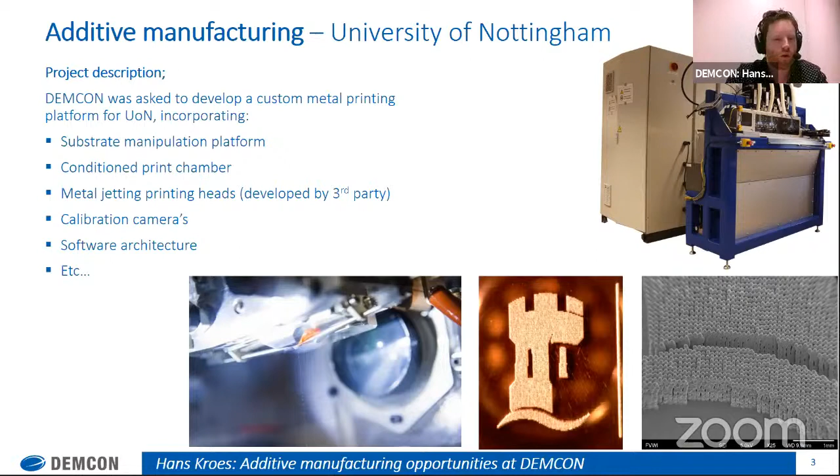The second example I'm able to provide during this presentation is not so much a metal printer, but a very interesting printer. It's a polymer printer, which is able to provide 3D prints with PEEK. I'm not sure if everybody is familiar with the polymer terms, but PEEK is a very high performance plastic, up at the top peak of the pyramid of polymers. It's relatively hard to print, but it's a very interesting material from the perspective of chemistry and strength.

And we were asked by our customer Bond 3D Printing, so the company owning this printer is Bond. They contacted us a few years ago, and they envisioned a way to perform 3D printing with this material, so with PEEK. And during the course of a few years, Demcon has developed a complete 3D printing system for our customer Bond to make sure that they are now operating with multiple of these large industrial 3D printers, able to manufacture high quality PEEK material parts. So they are really unique in the industry at this moment.

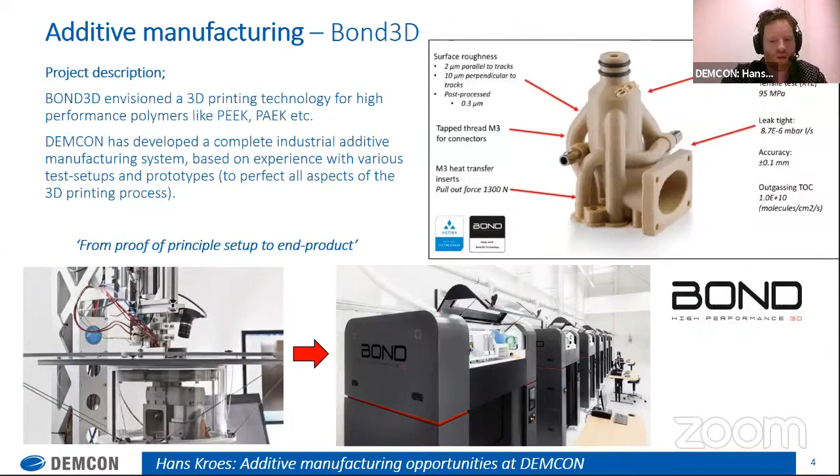So this is a clear example of how Demcon is able to answer a question from a customer, like: we have an idea how to make this material printable and how to make sure that the strength of the material is really incorporated in the part. Can you build a machine for it that can make it industrially printable? And that's what Demcon eventually did. They made a complete 3D printing platform all the way from test setups to prototypes to now the final production series. So that's in a nutshell what Demcon can do for customers.

Obviously, yeah. You need the heavy questions. Yeah. I wrote them down. Yes. What can you do for us, and what can we do for you? Well, exactly. What can you do for us?

Well, at least for me, I stepped into this meeting to get a first glance of what is out there in the industry of metal 3D printing. Obviously, it's more focused on the photonics, which is a bit of my background, but not my current role within Demcon. But what you can do for us: if there are challenges in the community, in the industry, contact us to see if there are any opportunities in which we as Demcon, with our background in photonics, in mechanics, in putting ideas into market all the way through the prototyping phases, etc., can do development for you. So we as Demcon provide the technology, you provide us with the idea, however young the idea is. Yeah. Very good.

And also considering that you show something that is not only metal printing, but also polymer printing. The good point is that for the monitoring people, dealing with process monitoring, this is also attractive. And given that we have another camera maker in the room, maybe now it's time to give the word to Germán from New Infrared Technologies, looking more at the longer wavelength, and let's see what their solution is, right, Germán?

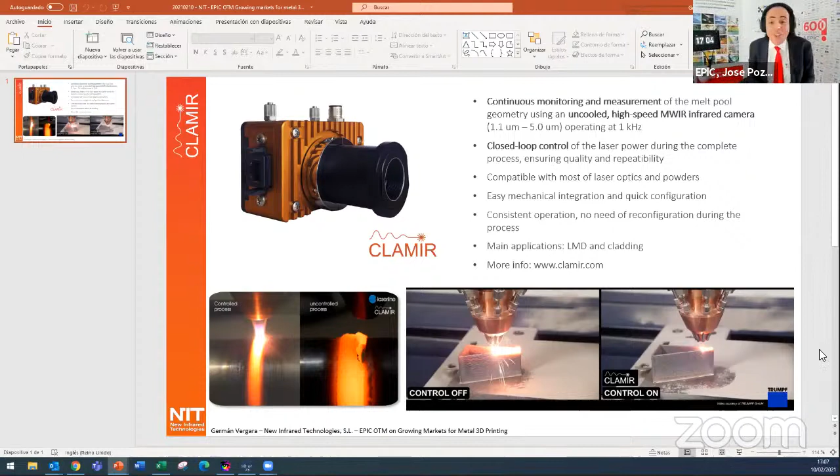Thank you very much for this. I mean, actually, the MWIR cameras of NIT have been attracting a lot of interest from this industry. We are developing, as many of you know, the Mid-Infrared Alliance with all the companies developing mid-infrared technologies, and NIT in the MWIR sector is actually one of the driving forces here. So thank you very much for this.

It is great what you're doing in 3D printing, and it is great what everybody is doing in the 3D printing world. I want to finish the meeting with two people. I want to first give the word to my two gold stars of the show. First, Harry from Additive Industries. Harry, it was a great meeting with lots of different room for cooperation. Give me just one final remark, one final thought to send these people away.

Okay. Well, once again, it was a very exciting meeting, with all the knowledge coming here together. And I think approaching the challenges of additive manufacturing with this broad scope, I see a lot of connections coming up, a lot of opportunities. But in general, I think with this drive of innovation and all this knowledge together, we will definitely move this technology forward into, let's say, being embedded in and maybe taking over conventional technology. So absolutely. In a meeting with Equinor, with Ferrari, with AIDRO, with AMCM, so much room for cooperation.

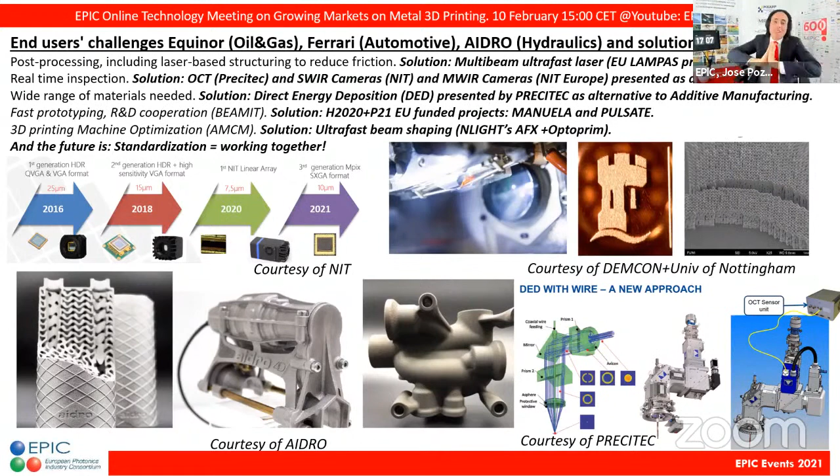I just want to say that, you know, it looks like the meeting is over, that we can relax now. No, that's wrong. From Nordvik by the Sea, I can tell you that the meeting starts now. The meeting starts with the follow-up. All of you have presented room for cooperation, but now is when you have to exchange emails, get in touch with each other, have conference calls, and make innovation happen. Nobody's doing anything great in the world by doing it alone.